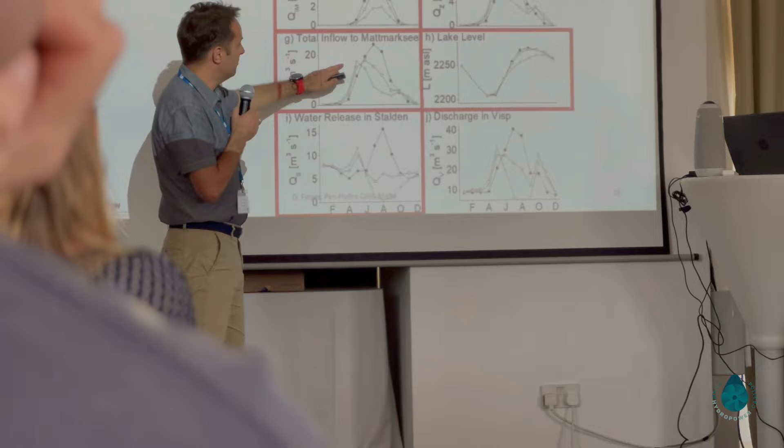Okay, so once again, for people online who could not hear my first couple of sentences: I just mentioned that this will be a research-focused session on unconventional hydropower, and we focus on the role that this unconventional hydropower can have on grid flexibility.

We're going to have three speakers, three young researchers, either last year's PhDs or early postdocs, so I will not waste more time with the introduction. I will jump to the first presentation. The first speaker will be Dr. Stefano Cassano. He's from HES-SO in Switzerland, and he's going to talk about increasing operational flexibility of hydropower, application to La Rance station and other use cases.

Just give me 30 seconds to better introduce Stefano. He received a master's degree in electrical engineering from the Polytechnic School of Genova in Italy in 2018. As part of the Erasmus program, he also conducted research at the Université catholique de Louvain in Louvain-la-Neuve, Belgium. He also holds a PhD in electrical engineering from ParisTech University PSL, earned in 2022. Since 2023, he is a postdoctoral researcher at HES-SO in Switzerland. Stefano, the floor is yours.

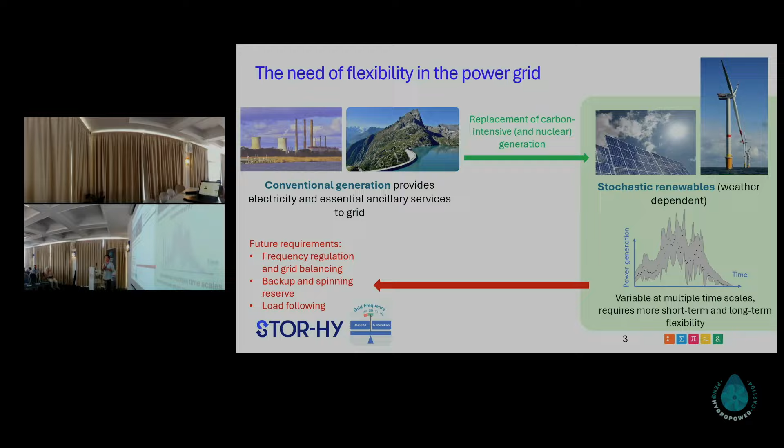In particular, they will be asked to provide more services such as frequency regulation and grid balancing. That means we want to keep the grid frequency at 50 Hz, so this generation has to play a bigger role to balance this frequency. We also have backup and spinning reserve, because one of the key features of the grid is inertia, so we need the spinning rotation of the machines. And then also load following, which means we should provide the capability to increase the power to match the demand.

Now, hydropower is the largest source of renewable electricity worldwide, with more than 50% of the total renewable generation. Hydropower plants are dispatchable, which means they can contribute to grid flexibility in both the short term and the long term. Regarding short-term flexibility, hydropower plants can provide fast regulating power. Usually, hydropower plants can increase their production by about 20% of nominal capacity per minute, and they also provide fast startup times thanks to the lack of thermal time constants compared to fossil fuel-based power plants.

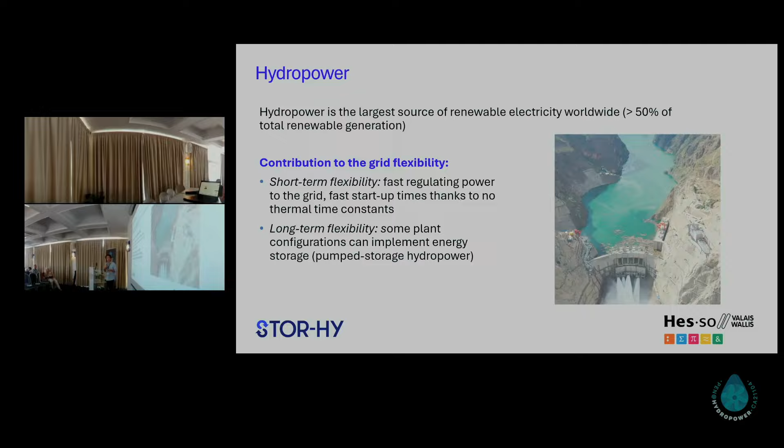Then, for the long-term flexibility, some of the plants can provide storage, for example, the case of pumped-storage hydropower plants. Okay, so the future challenges for the hydropower plant will be that operating this plant in the future grid will require upgrades to handle the increased operation duties of the plant.

So among the proposed solutions or technologies, it's worth mentioning two technologies, which are the variable speed and the hybridization. The variable speed refers to decoupling the grid and the generator frequency to have a more flexible control. Usually, for example, the pumps are operated at fixed speed, which means that we cannot really change the speed of the pumps. Therefore, with variable speed, perhaps we can operate in other working conditions and perhaps increase the efficiency of these units. And with hybridization, I refer to coupling a battery energy storage system with the plant.

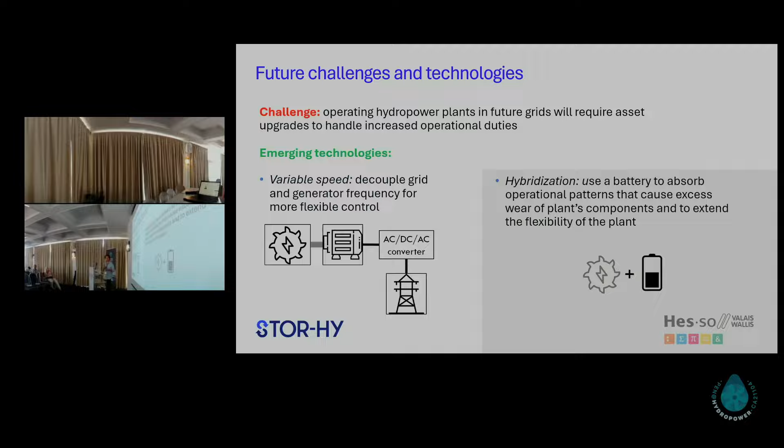So hybridization will be the focus of today's presentation, so I will spend some other words on it. This is the concept of a hybrid hydropower plant, which basically means coupling a local battery with the power plant, connected to the same SCADA system. The advantages are multiple. For example, the batteries can reduce the regulation duties of the hydropower plant. That means they can decrease the fatigue, for example, of the mechanical components of the plant.

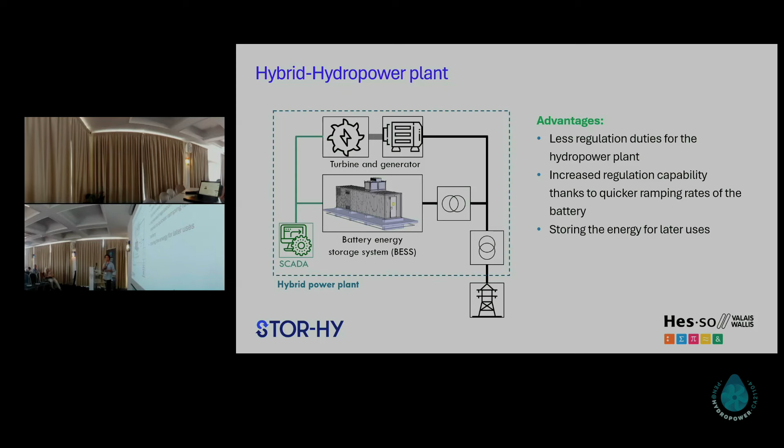Another advantage is that it can increase the regulation capability because the batteries are very fast to produce power. Before, I was talking about 20% per minute for hydropower plants. For the batteries, we are talking about 2000% in seconds. So they are really fast. And then, of course, batteries can store energy, so we can store energy and use it later when the demand is more.

Okay, so we arrive at the main character of today's presentation, which is La Rance. La Rance is a tidal hydropower plant, and with its 240 megawatt capacity, when it was commissioned in 1966, it was the first and therefore the largest tidal hydropower plant in the world. Then in 2011, they commissioned another tidal hydropower plant in South Korea, so now it's the second one in the world, but it's still quite big. The plant is equipped with 24 bulb units, 10 megawatts each, and they feature four-quadrant ability. That means that they can be operated as turbine and as pump, and they can turbine in both ways and also pump in both ways.

The nominal head of the plant is 6 meters, so quite low, because it's tidal. Then we have a nominal discharge of around 170 cubic meters per second per unit, and a total generation of around 490 gigawatt hours per year.

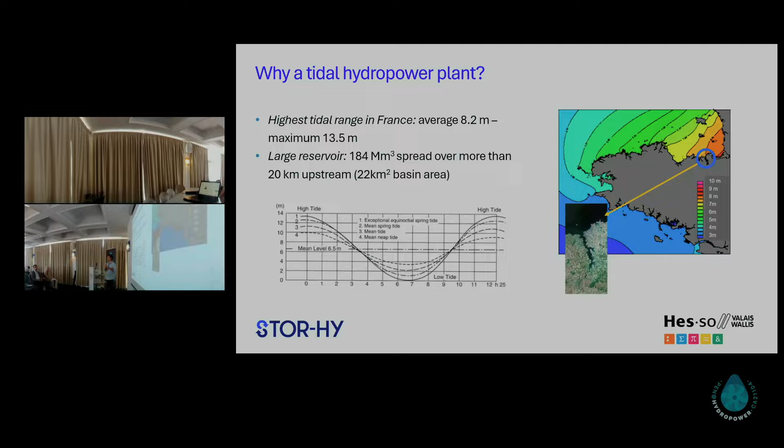So why a tidal hydropower plant? Because in this region, which I forgot to mention, we are in Brittany, in Dinard, which is close to Saint-Malo. In this region, we have the highest tidal range in France, with an average of 8.2 meters and a maximum of 13.5 meters. And we also have a large reservoir, given by the Rance River, that has 184 million cubic meters of water, spread over more than 20 kilometers upstream, resulting in a basin area of around 22 square kilometers.

Now, how is this plant normally operated? This plant is normally operated in two ways. The first operation cycle is called simple effect, or ebb generation, which means that we use one-way tide utilization. Perhaps, okay, I can point, nice. This means that the basin is filled at rising tide, and then the water is turbined when the sea level decreases.

Sorry. Okay, I will use my hand, sorry.

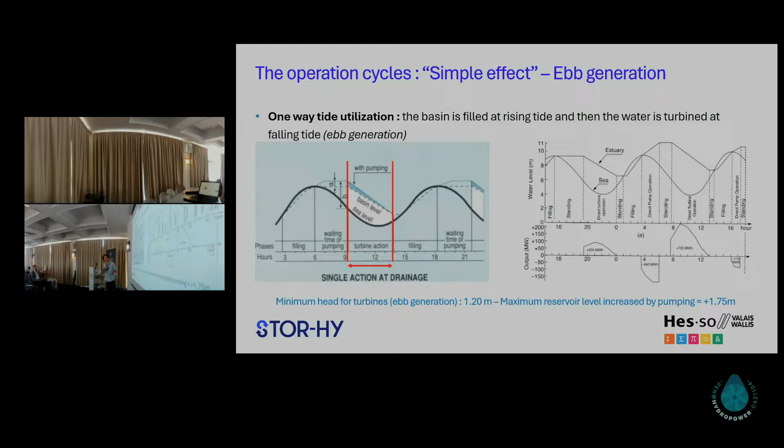So this means that compared to the previous case, when we are in the... now it works. Okay, nice.

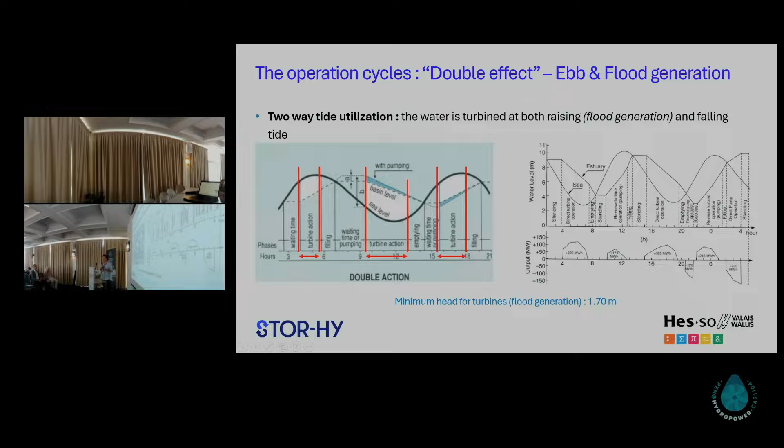And this operation actually allows us to spread the production more throughout the day compared to the case before, because before we had more, let's say, zero power production. Now with this operation, we can spread the power production more. And the minimum head for the reverse turbine mode this time is 1 meter and 70.

So this slide shows the share of the operation of this plant. Most of the time the plant is operating in the first mode, the ebb generation, accounting for 60% of the total operation. Then the reverse pumping is quite uncommon, around 0% of the operation, so almost never used. Then we have the flood generation, which is the reverse turbining, which accounts for 2 to 6% of the total operation, and only when the tides are really high, above 12 meters.

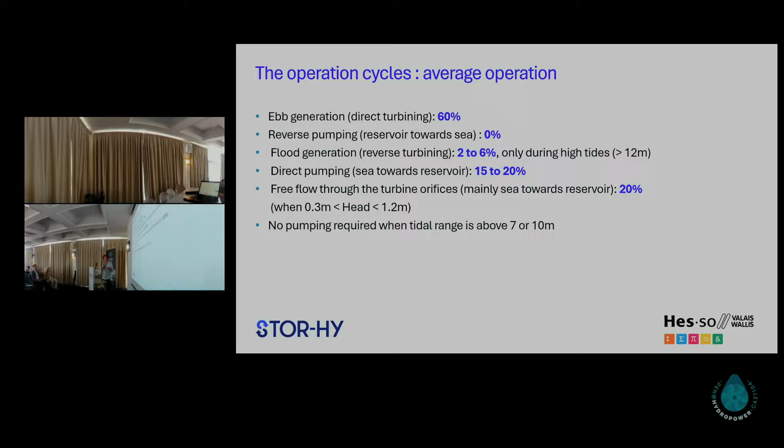And then we have the direct pumping, when the pumps increase the level of the basin, which happens for 15 to 20% of the operation. And then we have the free discharge that accounts for 20% of the operation. And another thing is that no pump is required when the tidal range is above 7 or 10 meters.

So now we saw this kind of operation, and we can draw some conclusions. The first is quite obvious: since this is a tidal hydropower plant, the power production depends on the tidal cycles. So it depends on nature, and we don't really have flexibility in that. The second point is that the plant is used only for power production, and therefore it doesn't really provide services to the grid, for example, frequency regulation.

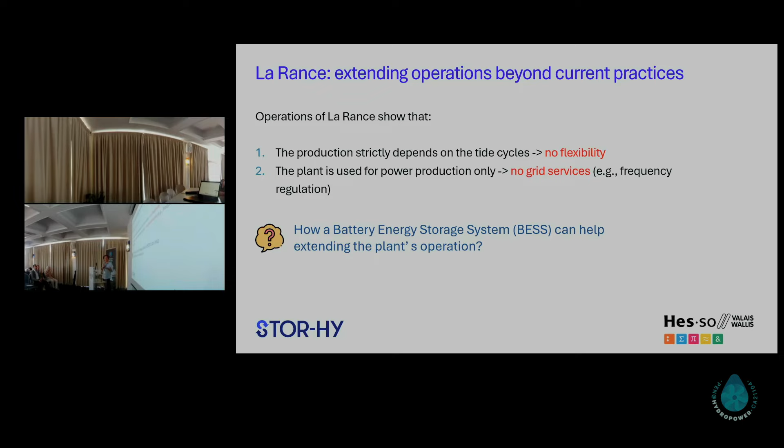So now the question we ask is: can a battery actually help to extend the operation of these plants, and how? To answer this question, I will introduce 2 use cases. The first one is about generation shifting. We saw that traditionally the plant is operated these 2 ways. The idea is to implement a battery to shift part of the generation from the tides toward the peaking periods, adapting the plant to human activities more than the natural cycles. And the second point is to spread the tidal generation through the day to avoid zero generation hours.

So the benefits: one I already said, to align the generation with the grid needs more than natural cycles. The second is to improve the dispatchability and the flexibility of the plant, because we want this plant to behave more like a conventional hydropower plant, so a controllable generation. And third, the battery can also be used to provide other services, for example, frequency regulation.

So the idea is very simple. The working principle is to use the battery to store some of the energy produced by the turbine, and then use this energy later. For example, if we consider 1 unit, instead of producing the maximum power, we can reduce the power injected into the grid, and use the other part of the power to charge the battery, which can then be used later when needed or to spread the power production.

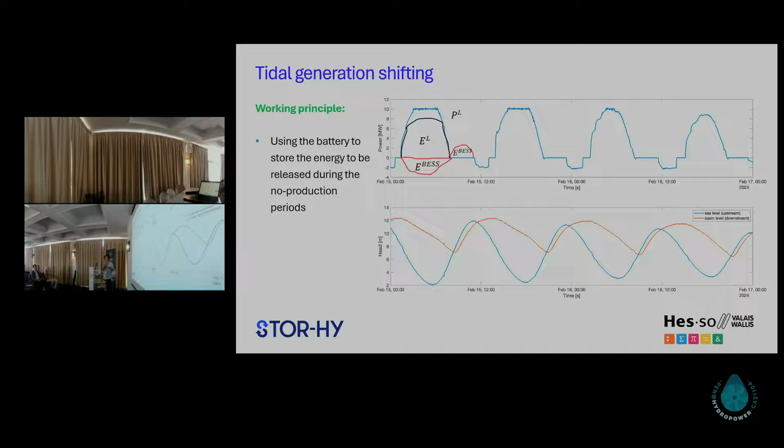So now the question we want to answer is how big the battery is going to be, or better, how we size the battery in an optimal way to also provide a good control. So to answer this question, we formulate this preliminary optimization problem, which basically aims at sizing the battery, but also finding a way to control this battery in an optimal way. So the formulation is the following.

In general, optimization problems are in the sense of minimizing some costs subject to some constraints which are related to the operation of the battery. So in particular here, we have the cost function, which is composed of two terms: the CAPEX and the OPEX. The CAPEX are the initial capital investment. So we want to minimize how much we are going to pay for the battery in terms of power and energy. And on the other side, we want to minimize minus these terms, which means we want to optimize the OPEX, which are the revenues from the battery.

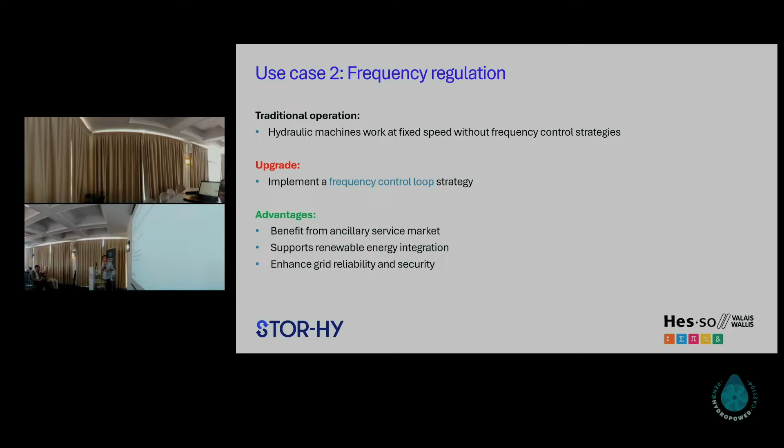So just to give an overview of how normally a hydropower plant is controlled to provide frequency regulation. A hydropower plant usually implements a speed governor, which basically controls the rotation speed of the machine to follow a design value, for example, the grid frequency of 50 Hertz. The speed governor, which is this one in the figure, implements a PID controller that translates the difference between the 50 Hertz and the speed of the machine into a guide vane opening. This means that if we have an imbalance, for example, a drop in the frequency in the grid, the controller tells the plant to give more power by opening the guide vane.

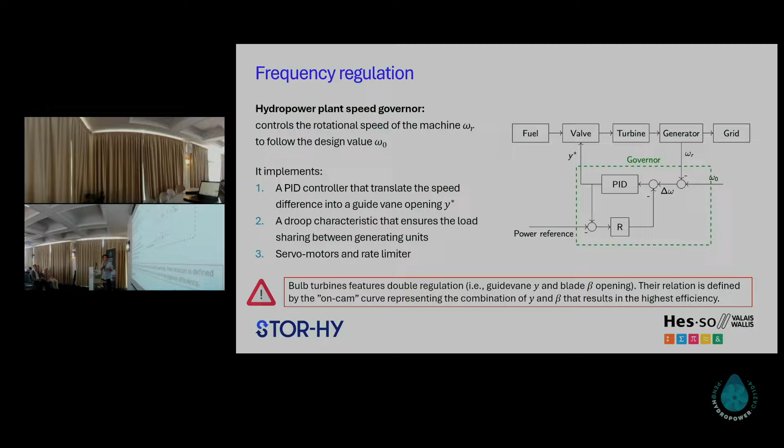This is for conventional hydropower plants. In the case of La Rance, we have bulb turbines. So instead of having just the guide vane, we also have another control organ, which is the blade. And usually the two are related by what is called the on-cam curve, that is the best combination of the guide vane and the blade opening that results in the highest efficiency. Then we have the droop characteristic that tells how much power the unit can provide. And then we have the servo motors and rate limiter, which are not drawn in this graph, but they are also in the controller.

So for a hydropower plant to provide frequency regulation, it is important that it fulfills what is called the pre-qualification test. This test basically investigates the ability of the controller to provide the service, but also the stability. The test consists in imposing a frequency deviation on the plant and then seeing how the plant reacts. In particular, the plant has to deliver 50 and 100% of the shared power within 15 and 30 seconds without exceeding some boundaries. In other words, it must not oscillate.

And the power that it's providing is set based on the droop, which is defined as follows. And basically here, the lower the droop is, the higher the power the hydropower plant can provide.

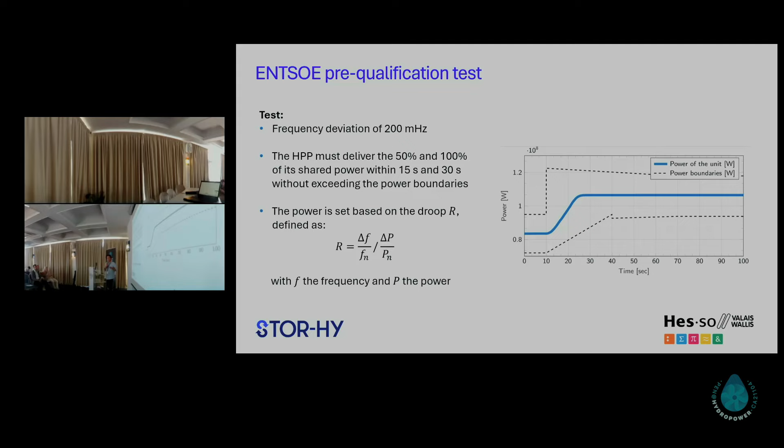So now, this is the idea of implementing also a battery. So how can a battery help to improve this frequency regulation? So the methodology is the following. We have the grid frequency, and we give this grid frequency to the hybrid hydropower plant. And then we have a hybrid controller, which we have to design, that basically wants to split the frequency between the battery and the hydropower plant.

So one idea could be to give to the hydropower plant the smoothest variation of the frequency, so that the hydropower plant can regulate in a smooth way and therefore reduce the fatigue of the mechanical components. The battery instead can take the harshest variation because it can provide fast power.

So to conclude, we saw how hydropower plants can contribute to enhance the flexibility of the grid. I showed how the La Rance hydropower plant is normally operated, pointing out the two critical aspects, which are the fact that the production depends on the tide, and that the plant is only used for production and not for regulation. Then I presented two use cases to extend the operation of La Rance, and I showed how we can preliminarily size a battery for the case of tidal generation shift.

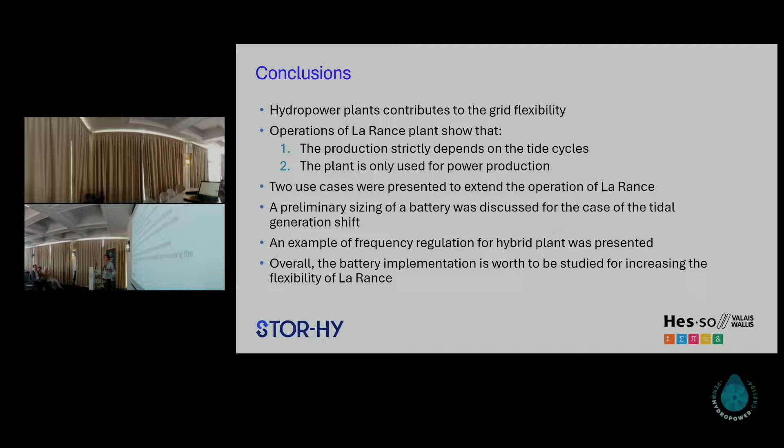And then I also provided an example of how a battery can increase the operation of the service of frequency regulation. And finally, to conclude, I would say that this battery implementation, in my opinion, is worth studying to increase the flexibility of this hydropower plant.

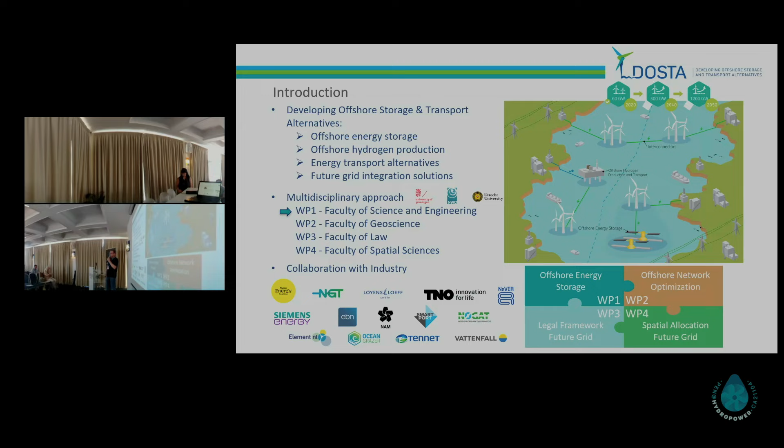We also had someone from the University of Groningen, from the Faculty of Law, who looked into the legal framework that we need to develop for the future. And from the Faculty of Spatial Sciences, we also had a student looking into the spatial allocation of the new renewable energy sources, how we could optimize that in the future. So my focus was mainly on the offshore energy storage system.

We would expect that this so-called ocean battery system would operate around the minute and hour market, similar to conventional pumped hydro. And we can highlight 3 development phases. Currently, we are in phase 0, where we're looking at the working concept and prototyping, and experimental measurements are being taken. The next step would be phase 1, where we want to place around a 1 megawatt rated system into a sand excavation lake.

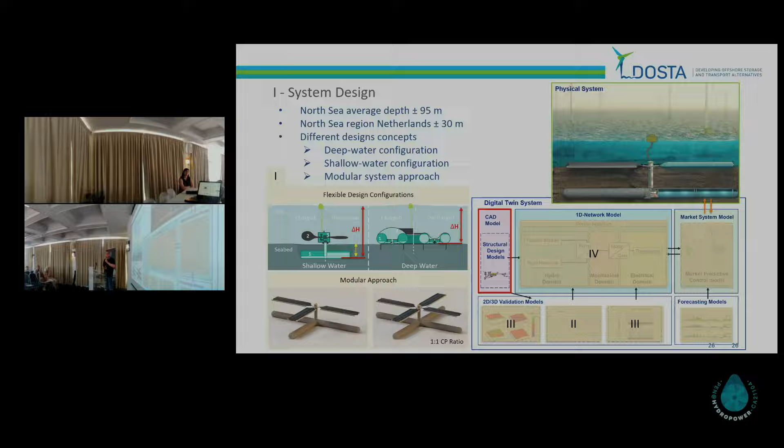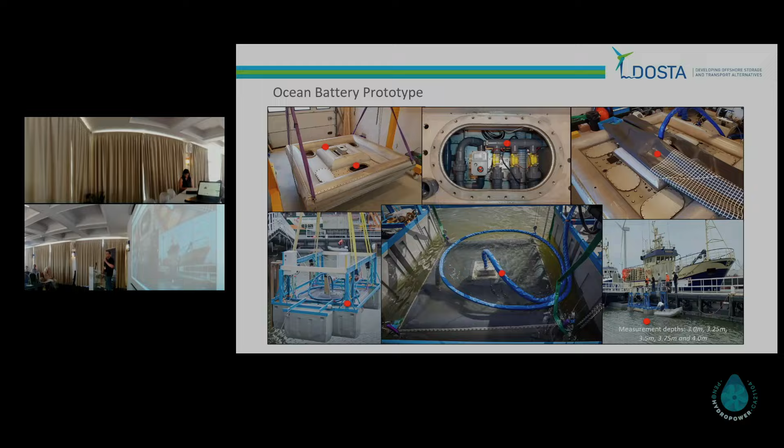On the bottom left side, you can see the barge system, which we also designed to be able to lower the system to the determined operational depth to be able to do multiple experimental runs. So we could also define the head in the system during the operation for every experimental run. In the middle bottom side, you can see the umbilical line, which is also seen on the right side, and you can also see the location, the Eemshaven in the north of the Netherlands, where we performed the experiments for the first prototype.

So one of the main objectives for the prototype session was to validate the working concept, also to see what the impact would be on the internal head losses of the system or the dynamics impacted by the novel elements that we added to the system. And also we wanted to measure the overall internal head losses. And then in the end, we wanted to scale up the system with a software that mimics the transient dynamics of the internal prototype and to determine its overall round trip efficiency. So under optimal conditions, the prototype is operating at around 77% round trip efficiency.

You can see here the sensors that we put down at different locations throughout the system to measure its internal head losses. I will come back to that later. It's one of the validation models that we use as an input to the 1D network model for simulating the transient dynamics of the system.

Now, another key feature is that since we placed the system into an open water environment, that's the goal of phase 3, we need to know what the environmental loading impact would be onto the system. Since we have a flexible bladder, we would want to know if marine biofouling, sand deposition due to scouring, or environmental loads due to waves, swells, and tides would have any impact on the transient dynamics of the system. So that we investigated with additional research. You can see some examples.

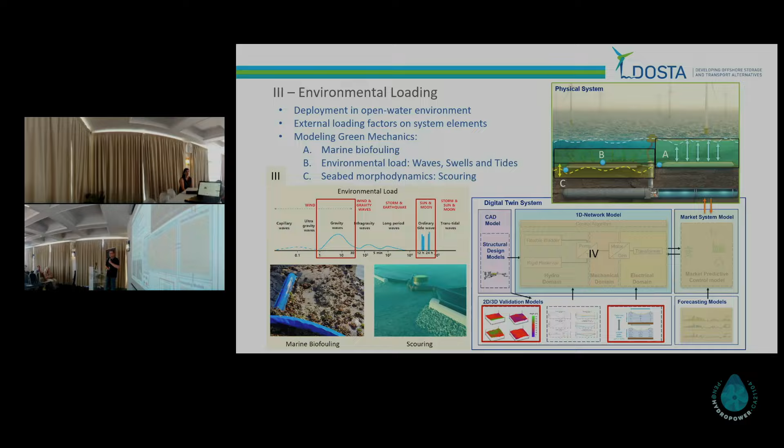We mainly focused on wind waves, swells, and tides for the environmental loading. We did some experiments also for marine biofouling over time. And together with the Deltares Institute in Delft, we also performed some scouring simulations and experiments. For the scouring, you can see here the setup of the system. The video is sadly not working, but you can see that we performed a scaled prototype experimental setup for one side of the system with the flexible bladder in there, the geotubes that would hold the system down, together with a part of the ducting and the base structure as well.

We performed some pressure measurements for different sea states, and we wanted to see the complex interaction between the structure and the seabed over time. We did that for different test conditions: for unidirectional flows, bidirectional flows, so for the tidal interaction, and also for once in 50 years storm wave conditions. For different orientations, we looked into the impact of scouring, and then together with the in-house software of Deltares Institute, we also scaled up the system to the large scale dimensions and performed this experiment again for a longer period of time to see if there is any impact of the scouring and sand deposition.

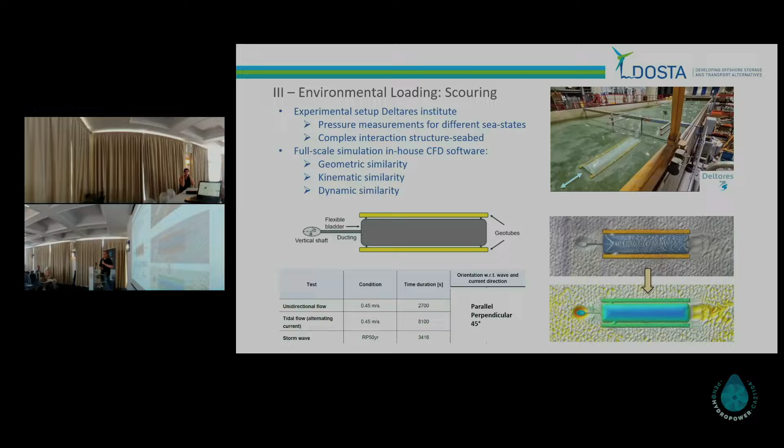For the waves, swells, and tides, we actually did a different simulation. We included the wave dynamics using linear wave theory, where we defined two main areas in the North Sea region, one in a shallow water region, one in a deeper water region. And there we identified what the combined impact would be of waves, swells and tides on the

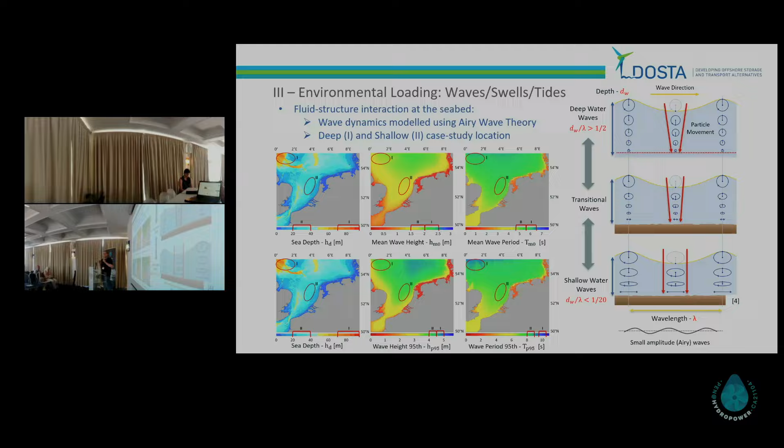flexible bladder. Because the idea is that since the flexible bladder would transfer the hydrostatic pressure of the surrounding seawater in a 1-to-1 ratio into the system, if a wave would pass over, there would be a pressure deviation that could propagate into the system and also would result in an alteration of the internal transient dynamics during charging and discharging operation. So we needed to be sure to see what the impact would be of this. So for both regions, we looked at different sea depths, different wave heights and wave period conditions, and we implemented that into the 1D network model.

For the simulation of the system, we collaborated also with Power Vision Engineering, a spin-off company from the EPFL, where we used their 1D network modeling approach to simulate the system. If the three different domains are combined, they're using an analogy for the SIMSEN software. So we could also simulate different Francis reversible pump turbine configurations to see what would be the optimal size for our system for every phase.

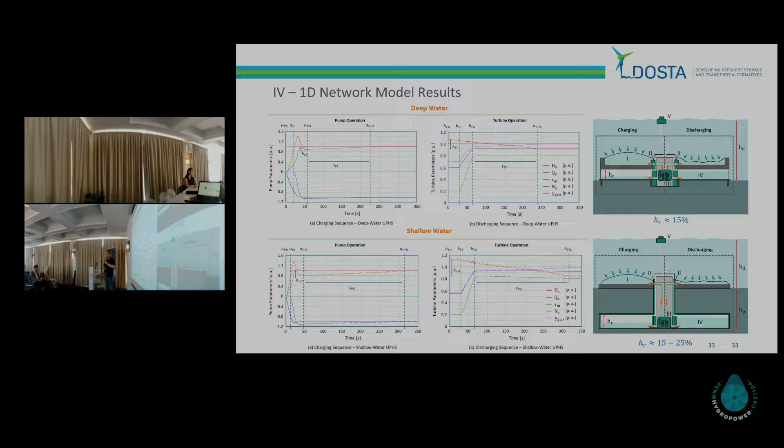So yes, this is a brief overview of the steps that we are currently looking into to develop the system, and we are currently looking into variable speed operations and operational control algorithms to also add to this system and expand it further. So to conclude, for the underwater pumped hydro storage system, we look at different design considerations based on

the deployment location. We use experimental measurements to perform and to validate the novel elements. We include external loading factors for the open water environment. And for future work, we want to look into more variable speed operations to see how far we can push this system and where we can operate. On the internal losses, we expect the external loading to have an impact of 1 to 2% of the head loss.

And the overall efficiency, as we see it now from the 1D network model simulation, is around 68%, the round-trip efficiency of our system. Yeah, that was my presentation.

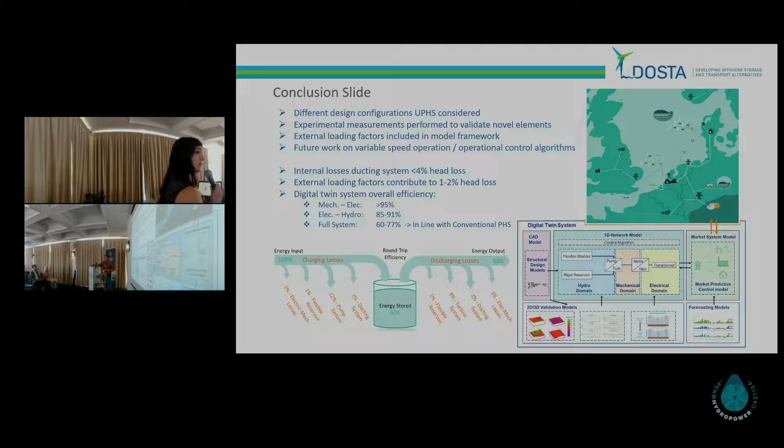So our next and last but not least speaker, Sudesh Dahal from ETH Zurich in Switzerland. He will talk about reservoir sedimentation management in Switzerland for sustainable hydropower under climate change. So we now go back a little bit more into conventional hydropower, but with a new hidden... doesn't this work?

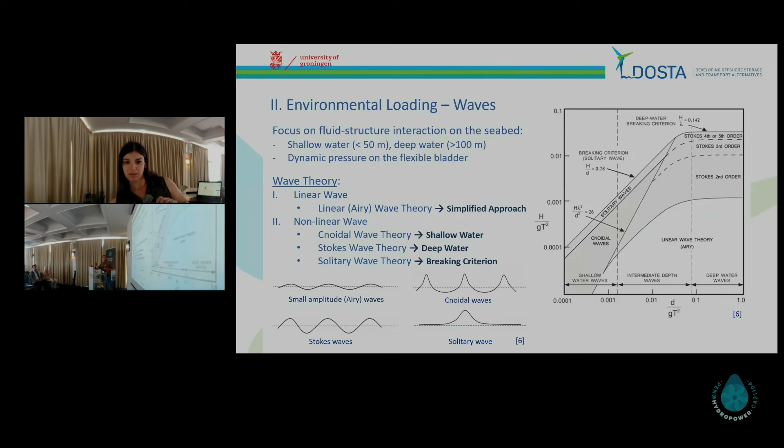Oh, those are additional. This was yours. They are the additional slides. Okay. Yeah, that one. This one. That's the first one? Yeah. This one? That's blocked. No, that's the previous one. No, the previous one is the one. And why is this blocked? There seems to be some... Yes. Okay, so that was just the introduction. Okay.

Let me introduce Sudesh. He's a civil engineer specializing in hydraulic and hydropower engineering with extensive experience in hydraulic design, sediment transport modeling, and sustainable reservoir management. He's currently completing his PhD in hydraulic engineering at ETH Zurich, where his research focuses on numerical modeling and reservoir sediment management strategies under future climate scenarios.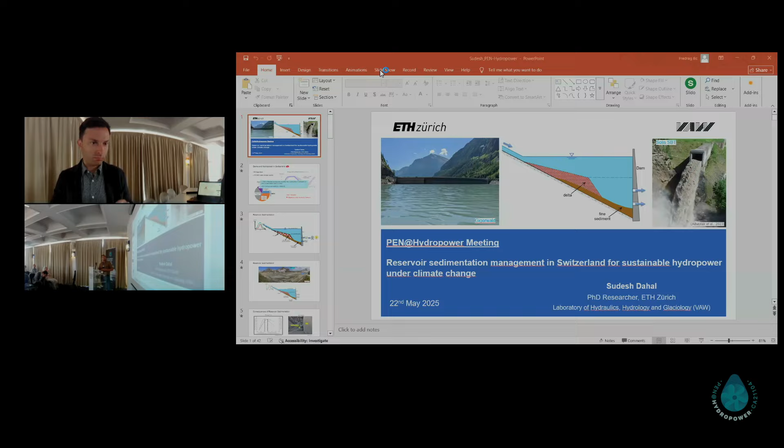So we will go a little bit back to more conventional hydropower now, but we will see which kind of hidden opportunities we have to improve storage capabilities in conventional hydropower plants. So in a sense, we will see some unconventional aspects. And we will see with Sudesh how it's possible to consider sediment management in order to improve the storage capabilities. Just try. Okay, now it seems to be all good.

Yes. Thank you, Elena, for introducing me, and good morning and welcome everyone to my presentation in this meeting. I am presenting my PhD research topic, which is reservoir sedimentation management in Switzerland for sustainable hydropower under climate change. So I'm mainly dealing with the problem of sedimentation in reservoirs.

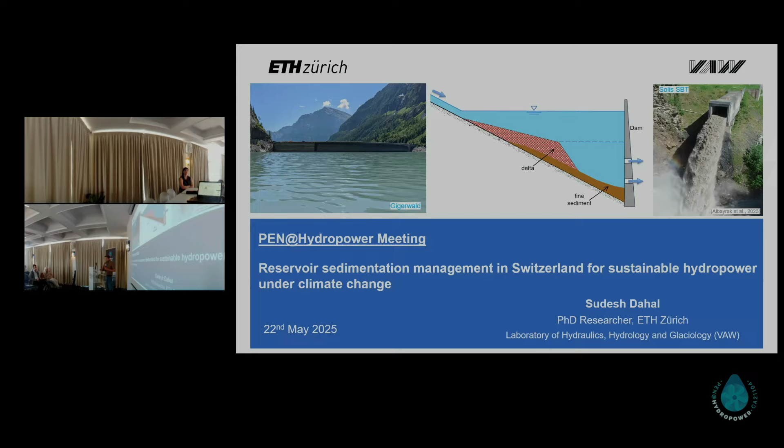The conventional way of operating hydropower reservoirs has mostly been to postpone the problem of sediment to the future. But I am trying an unconventional way of operation by integrating sediment management strategies to ensure long-term sustainability of hydropower storage capacities. A brief introduction about dams and hydropower in Switzerland. There are more than 200 large dams with about 3,100 million cubic meters of water storage capacity.

And in terms of electricity source in Switzerland, more than 56% of electricity is sourced from hydropower. And among that, more than half of the hydropower has the storage capacity flexibility, which is indicated by this seasonal energy content of Swiss reservoirs, which shows that the reservoirs are mainly used to store electricity during the summer months, during the high flow in the river, that is utilized during the winter months to balance the seasonal variation of electricity demand.

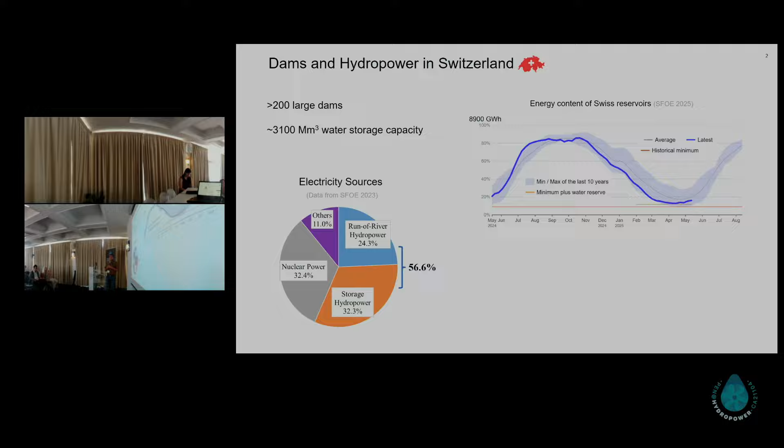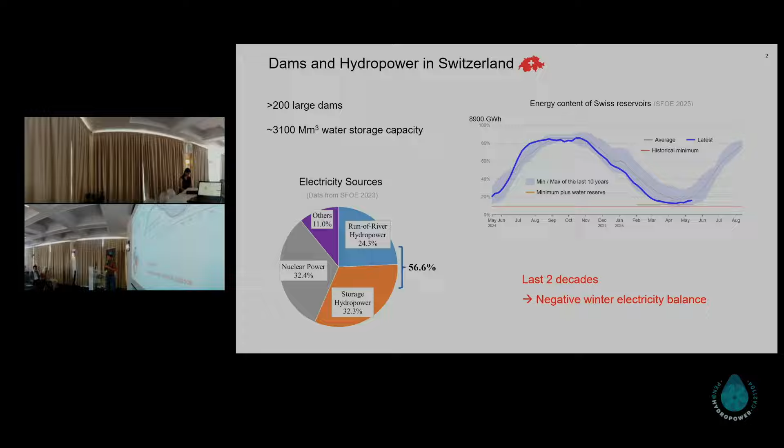However, in the last 2 decades, the balance of winter electricity has been negative in Switzerland, which emphasizes the importance of more storage capacities in Switzerland. And also, this is a statement from the EU Hydropower Alliance that indicates that about 1 terawatt-hour of flexible hydropower enables the construction of at least 3.5 terawatt-hour of intermittent wind or solar. So this emphasizes that storage hydropowers are essential not only for seasonal flexibility, but also to the flexibility to integrate the wind and solar renewables into the overall grid system.

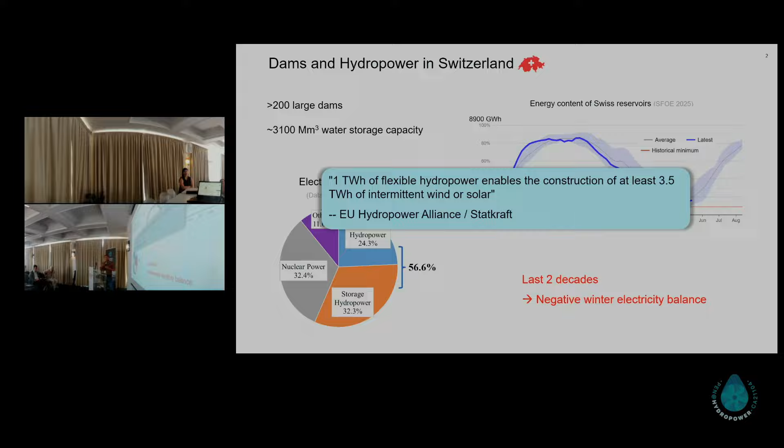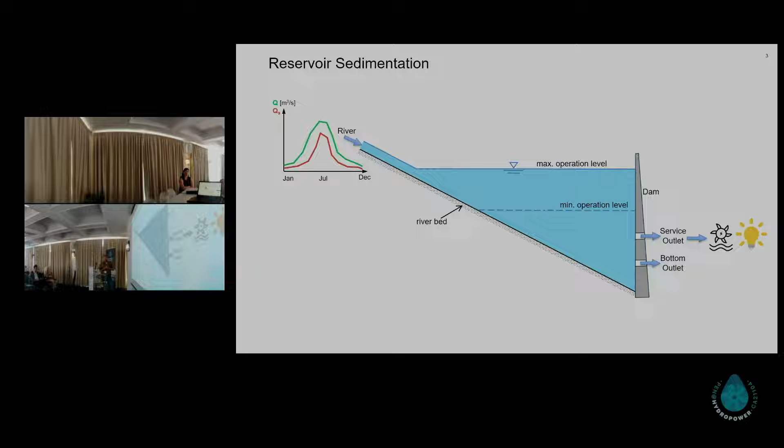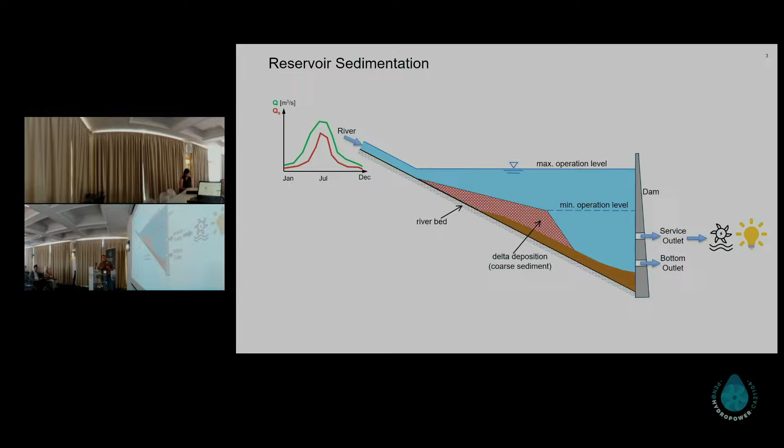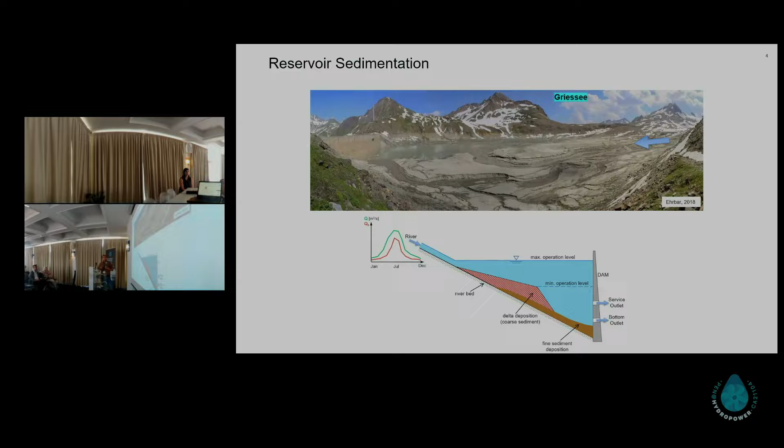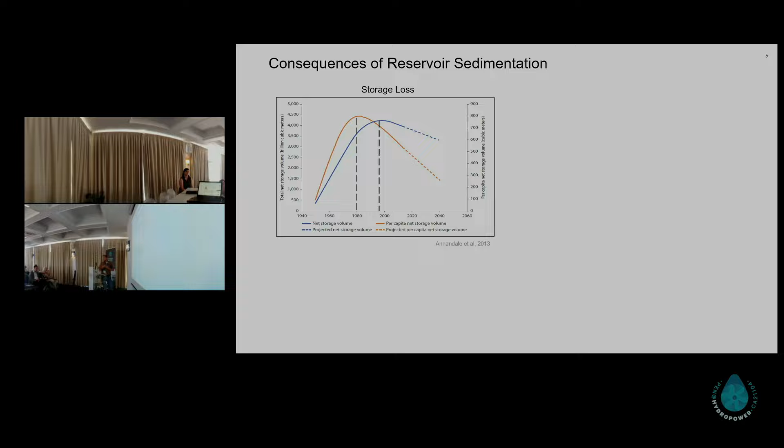So these are the main consequences of reservoir sedimentation. One of the main consequences is the loss in hydropower storage capacity, which indicates that currently the trend is declining. That means the increase in global water storage capacity due to construction of new dams is not compensating the loss in capacity due to sedimentation. And also in terms of per capita, this rate of decline is even more critical.

And another issue is the issue of dam safety. For example, this is the example of a reservoir in Switzerland, which has been impacted by large amount of sediment deposition just upstream of the dam. The sediment level was increased up to the level of the bottom outlet, which also impacted the safe operation of these dam outlets, thus causing a problem of the dam safety aspect of the overall dam component.

In terms of the cost of reservoir sedimentation, it is estimated that currently the overall cost sums to be around 21 billion US dollar per year. However, only a very small fraction of this cost is being currently addressed. And if no sediment management measures are implemented in the operational scenarios, these costs will be mainly postponed into the future generation, thus causing an intergenerational unfairness. So this emphasizes the need to conduct more intensive investigation on reservoir sedimentation, not only to understand the processes behind them, but also to plan for effective countermeasures.

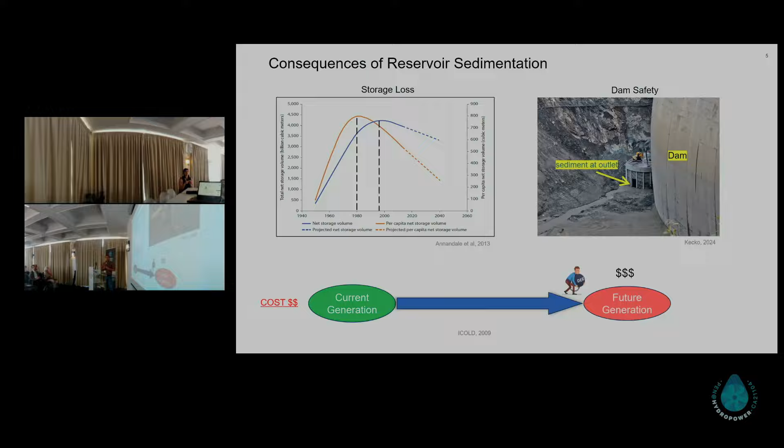And the investigation of reservoir sedimentation can be mainly done by conducting numerical modeling, which leads to the first research objective of my project, which is to conduct the 1D numerical modeling of sediment bypassing scenarios in a case study of Switzerland. Then I am also dealing with the problem of climate change scenarios in the case of Switzerland.

This is the plot that indicates that temperature has been rising in Switzerland since the last century, and there are three different climate change scenarios defined for Switzerland, which is the RCP 8.5, which is without any climate change mitigation measures. The best case scenario is the RCP 2.6, which is with high degree of climate change mitigation, and there is also an intermediate scenario called RCP 4.5, which involves moderate climate change mitigation scenarios.

And the main impact of climate change on the river discharge in Switzerland is estimated to be a seasonal shift in the annual runoff pattern. For example, the winter discharge may slightly increase as indicated in this plot, and the summer discharge may slightly decrease, thus causing a seasonal shift in the annual pattern of river flow.

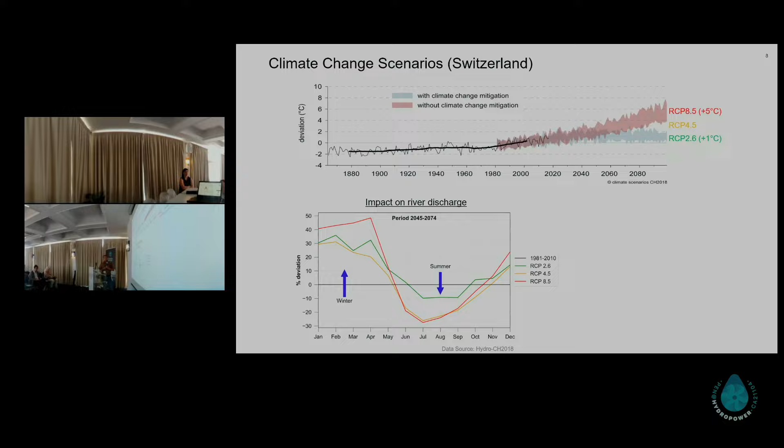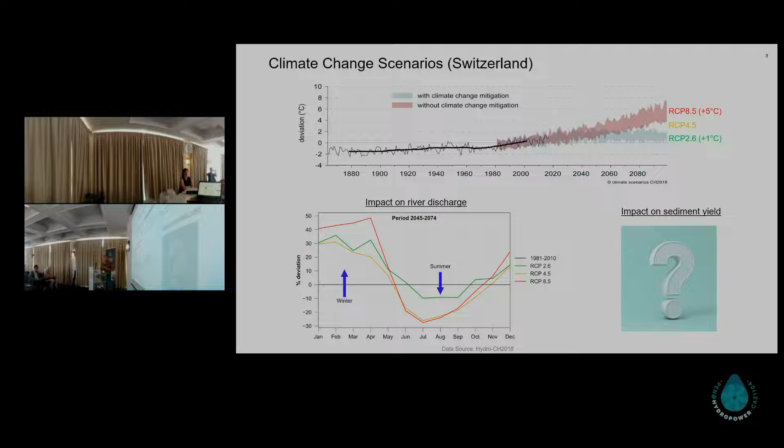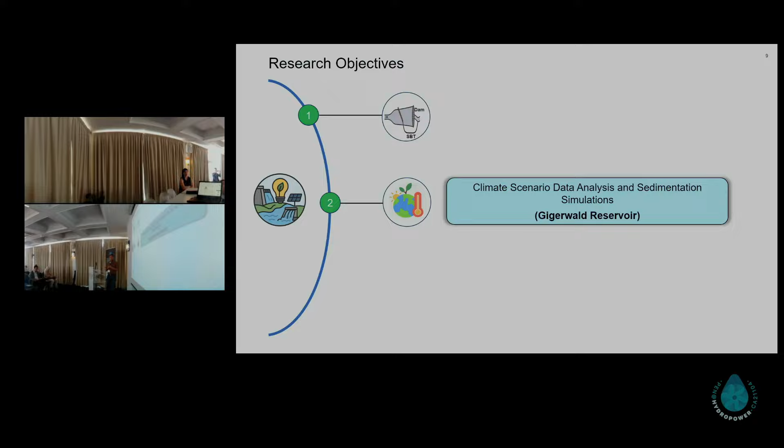However, the impact on sediment yield has been highly uncertain, although there are multiple hypotheses proposed. So a case-by-case study needs to be done to identify the impact on sediment yield for all these climate change scenarios, which leads to my second research objective, which is to conduct climate scenario data analysis and sedimentation simulations, in which I focus on a case study, the Gigerwald Reservoir of Switzerland.

which have a large degree of variance in terms of the water storage capacity. For example, it ranges from the capacity of 0.1 million meter cube to 400 million meter cube. Thus, a more improved estimate of overall reservoir sedimentation rate in Switzerland is necessary, that can be used to forecast a reliable estimate of the existing water and hydropower storage capacities.

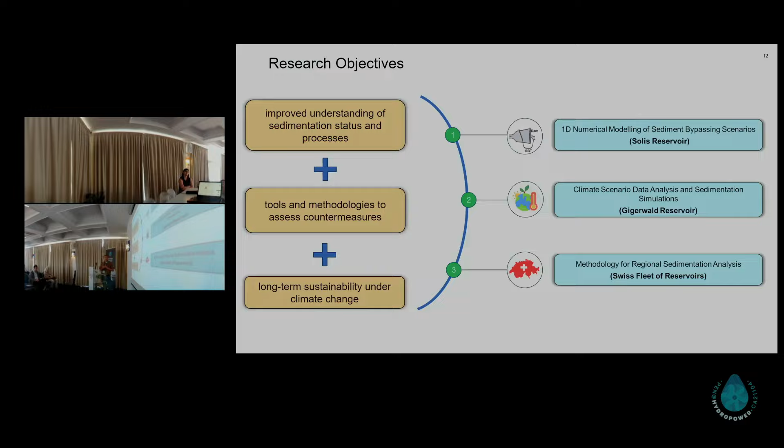This leads to my other research objective, which is to derive improved methodology for regional sedimentation analysis, in which I focus on the case of the overall Swiss fleet of reservoirs. And the overarching goal of this research project is to derive improved understanding of existing status and processes, also to demonstrate the tools and methodology to assess the countermeasures against sedimentation, to ensure long-term sustainability under climate change scenarios.

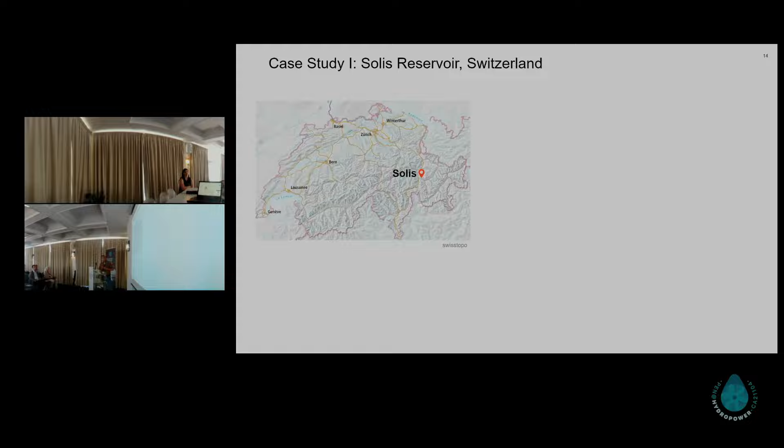So here are the methods and results of my first research objective. A brief introduction to my case study reservoir, which is the Solis Reservoir in Switzerland. This is the location of the Solis Dam in the map of Switzerland. This is the layout map of the reservoir, which is fed by the Albula River, as shown in the bottom right corner.

And the main feature of this reservoir is that it has a sediment bypassing tunnel, which is shown as that red line. This bypass tunnel has the inlet in the middle reach of the reservoir and was constructed in 2012 to mitigate the further adverse impacts of sedimentation. It mainly operates to bypass the incoming sediment away from the main part of the reservoir to release the sediment downstream of the reservoir, thus not allowing the incoming sediment to settle into the reservoir, causing more adverse impacts. And this sediment bypass tunnel is abbreviated as SBT, that I will frequently use in my presentation.

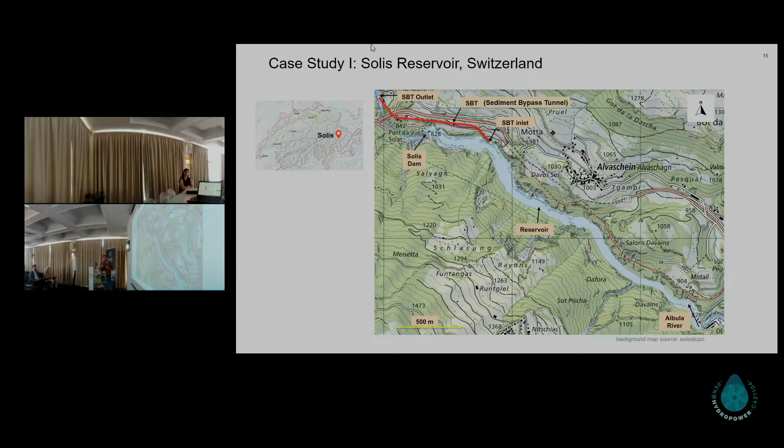This is about the historical sedimentation profile in the reservoir. And we can see that since its construction in 1986, there has been a large amount of sediment aggradation, not only in the form of the delta deposition, but also in the form of the rise in bed elevations near the dam. And in 2012, the SBT was constructed, which has partly mitigated further adverse impacts of sedimentation.

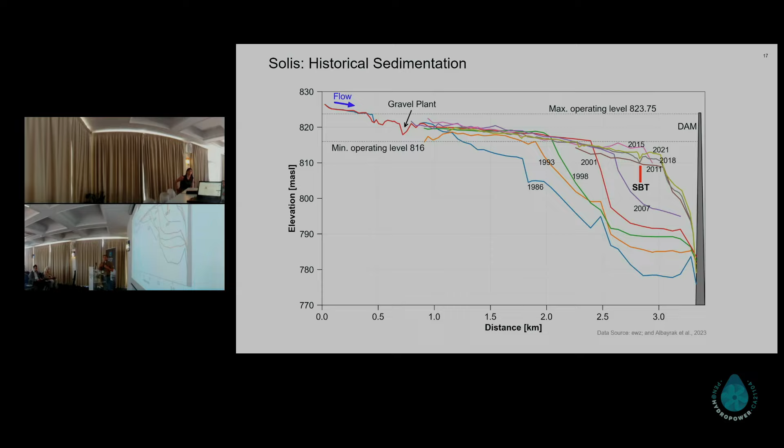And in my case study, I focused on the case of 1998 to 2001 to calibrate the numerical model, and then focused on the case of 2018 to 2019 to conduct multiple scenarios of sediment bypassing simulations in order to identify an optimum solution for the sediment management.

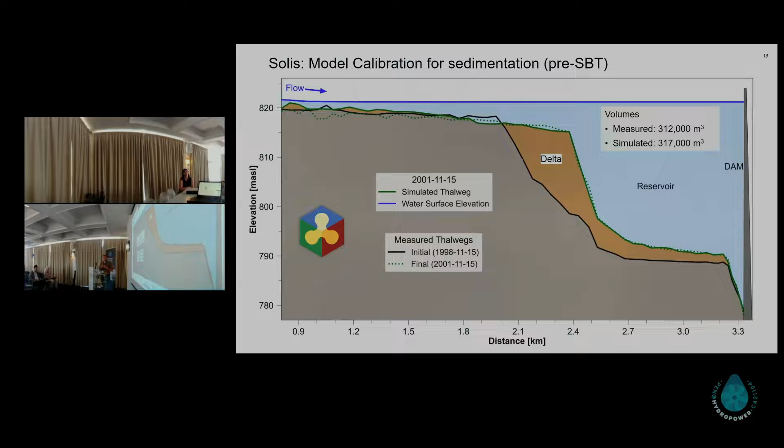So this is the result of my model calibration, which is an animation of the numerical simulation of the sediment input from the upstream region. So the upstream boundary is supplying both water as well as sediment in forms of bed load and suspended load. And the aim of this calibration is to match the simulated and measured bed profiles, which shows a good agreement, and also to match the sediment volumes, which is also in a good agreement, thus calibrating the overall model performance.

And for the modeling of SBT operation, this is a simple sketch of the different fluxes of the water and sediment through the SBT, and I derived a novel equation as shown in this plot for the flux of bed load that can be bypassed through the SBT in terms of the water discharge and the reservoir water level.

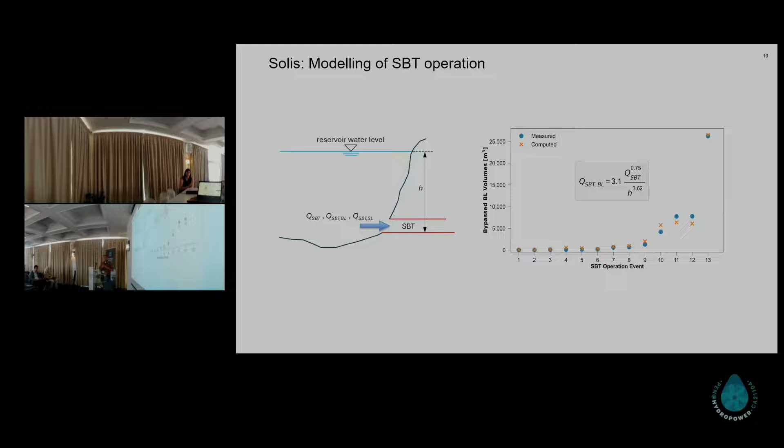And using this approach, I conducted multiple scenario simulations for the sediment bypass tunnel under a given flood wave of June 2019, which was a 5-year flood event in the reservoir. So these different scenarios were designed for different timings as well as duration of the sediment bypassing operation.

So all these scenarios have a different degree of cost related to the loss of revenue generation during the SBT operation, because during the bypassing process, the water cannot be used for the power generation. So I assessed all these scenarios by conducting numerical simulation to quantify how much of the storage capacity can be recovered under these scenarios.

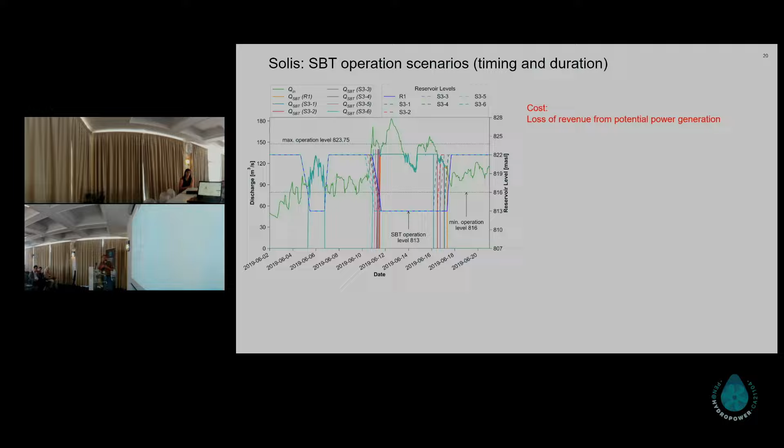So the cost of these scenarios is related to the loss of revenue from potential power generation, and the benefit is related to the additional revenue from peak energy generation in future that can be obtained from the recovered active storage.

So I conducted a cost benefit assessment, and the net benefit is computed as the difference of the benefit and cost. So this is the plot of the normalized net benefit for different price ranges of the base energy and peak energy price, where I demonstrate that it is possible to identify an optimum solution of sediment bypassing, which is not only technically feasible but also feasible in terms of the economic considerations. Thus, the numerical model is useful to conduct this type of analysis, also to support the economic viability of the sedimentation countermeasures.

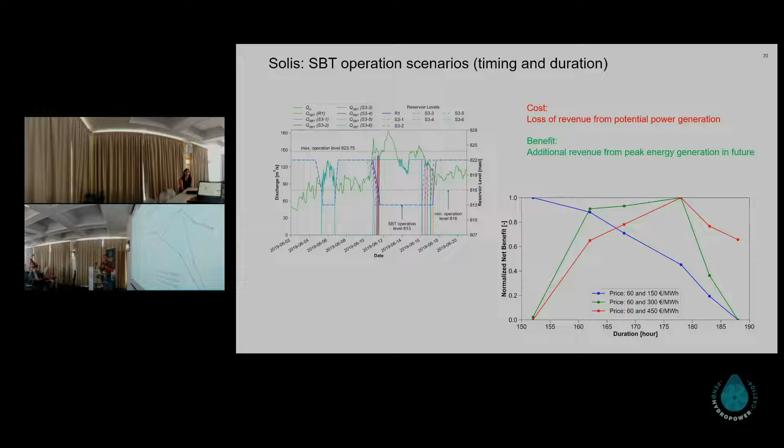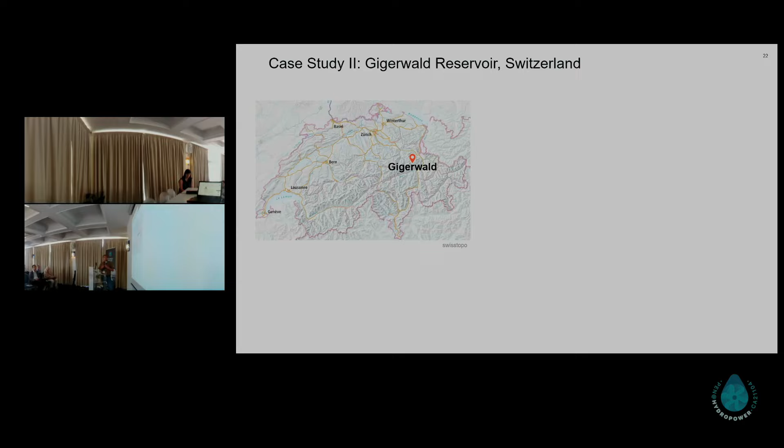I move on to my second research objective, which is the climate scenario data analysis and simulation, which is the case study of the Gigerwald Reservoir in Switzerland. This is the location of the reservoir in the Swiss map. This is the layout map of the reservoir, which is fed by the Tamina River, and it also has an inflow from an indirect catchment called Wistanenthal.

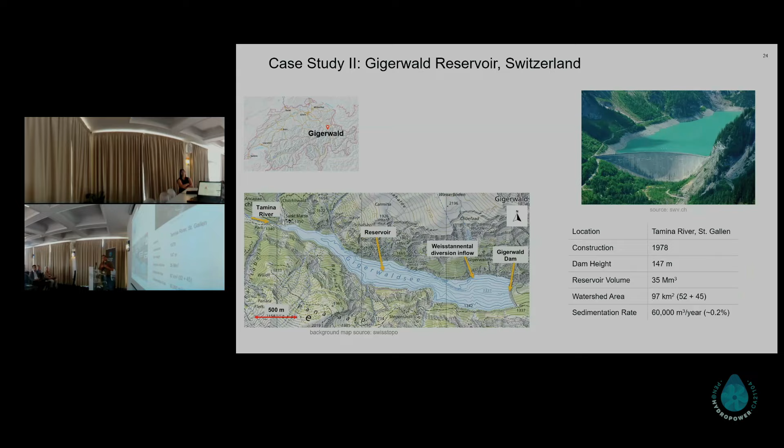This is the picture of the dam, which was constructed in 1978 as a 147-meter high dam with an initial volume of 35 million meter cube, and the sedimentation rate is estimated to be 60,000 meter cube per year. The main sediment problem here is the rise in bed elevation near the dam, which is about 0.5 meter per year. And because of this, the dam bottom outlet has been recently reconstructed to a higher elevation, which required a large amount of cost for those construction activities, mainly caused by the sediment problem.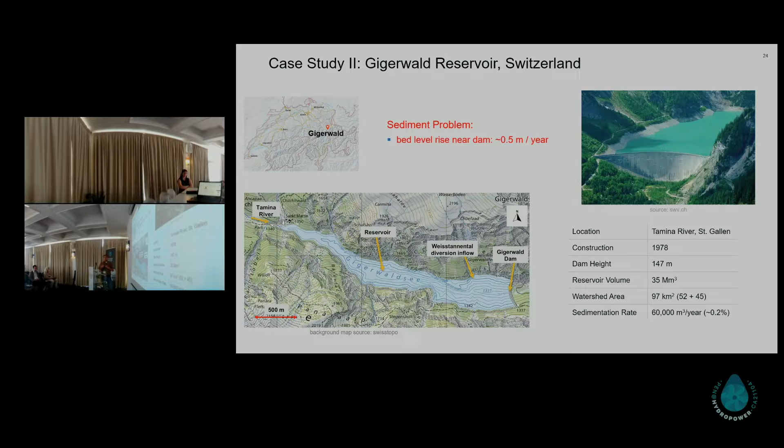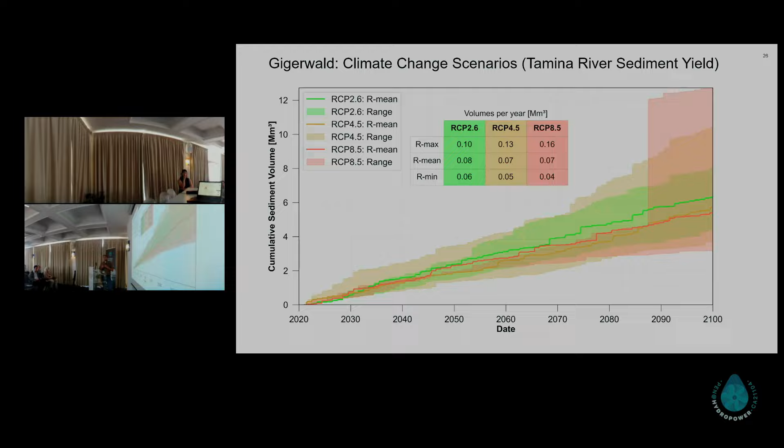I use this runoff data to derive the sediment input into the reservoir by using the validated sediment inflow equations based on numerical modeling. So this is how the sediment input looks until the end of the century for all these climate change scenarios. And it is interesting to note that in some climate scenarios, there is a sudden spike of sediment input, which is mainly related to the occurrence of extreme flood events associated with climate change.

So using this data and using the validated numerical model, I conducted a numerical simulation of sedimentation until the end of the century. So this is a brief animated video of the numerical modeling progression, which mainly indicates how the supply of sediment from the upstream boundary gets distributed along the reservoir. As we can see, a gradual increase of bed elevation, mainly in the middle part of the reservoir, and also we can see the rise in bed elevation near the dam, which is mainly caused by the inflow of fine sediment from the adjacent catchment.

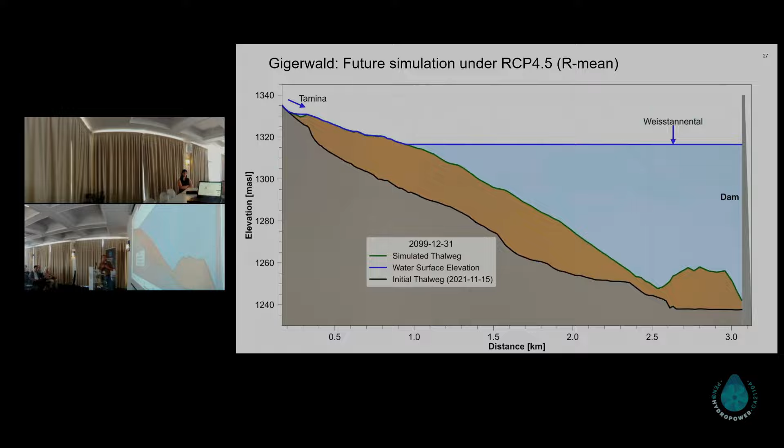And this sediment deposition is also gradually reducing the water and hydropower storage capacity of the reservoir. So this is how the result looks at the end of the century in the year 2100. So I demonstrated what kind of sediment management can be done under this scenario.

For example, the conventional approach of sediment management in this reservoir has been to limit the inflow of high sediment concentration from the adjacent catchment Weisstannental, which is adapted to be a concentration threshold of 4 gram per liter. And I demonstrated multiple scenarios of that concentration threshold. For example, by reducing the threshold to 2.5 gram per liter, it is possible to reduce the bed aggradation near the dam by a high amount, as shown by those multiple numbers of bed elevation rise near the dam.

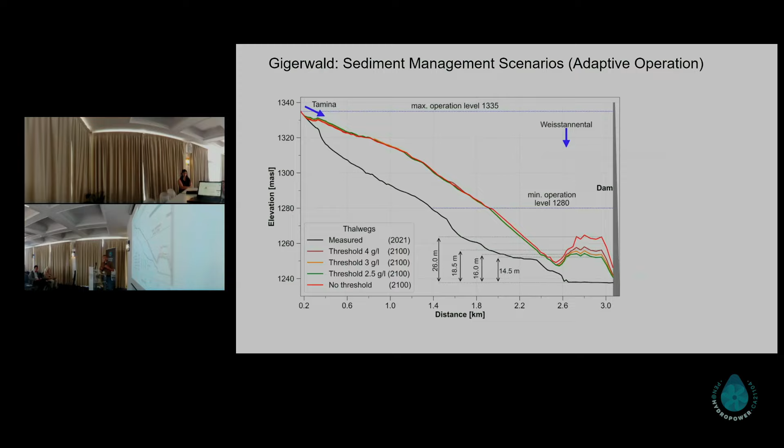And I quantified a metric called sediment management efficiency, which is the mitigation of potential impact of sedimentation against the impact without sediment management. And using these modeling results, I again quantified the cost and benefit metrics. For example, the cost of this sedimentation countermeasure is related to reduction in water volume supplied to the reservoir. So, for example, 28% reduction in water volume will cause a reduced bed aggradation of 11.5 meter

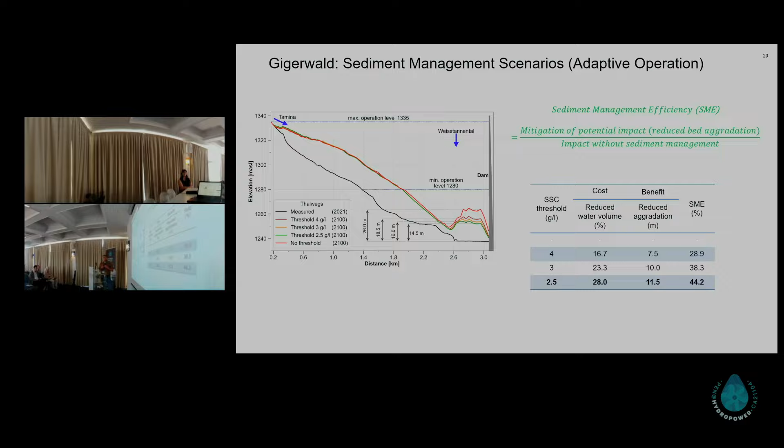with a sediment management efficiency of 44%. So these cost and benefit metrics can be used for a more detailed cost benefit analysis to support the optimization of sedimentation countermeasures in the long-term sustainability of the Gigerwald reservoir. And this approach can also be applied to other reservoirs worldwide. Finally, I defined an improved methodology for regional sedimentation analysis.

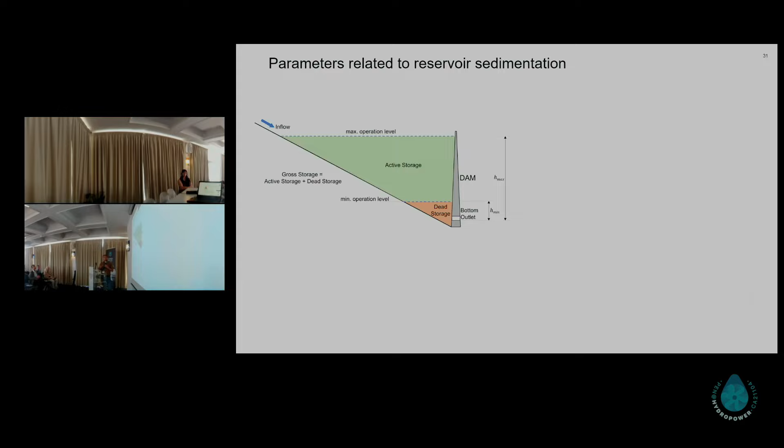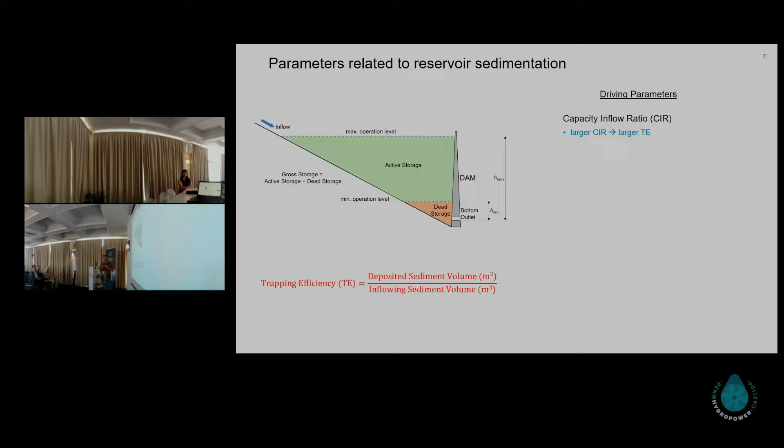Here, I briefly summarize the different parameters related to reservoir sedimentation. The main one I'm defining here is the trapping efficiency, which is the ratio of the deposited sediment volume to the inflowing sediment volume. And the main driving parameters for this trapping efficiency are the capacity inflow ratio, bed load to total load ratio, and the reservoir operation ratio, which is defined as the degree of fluctuation of the reservoir water level. And this trapping efficiency is defined as a function of these 3 different parameters.

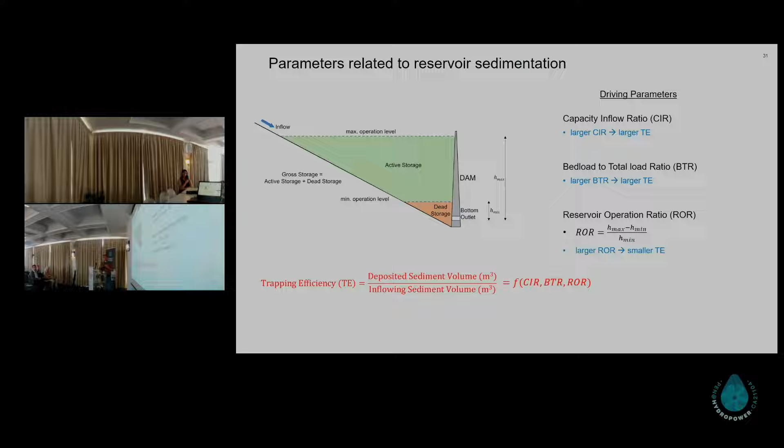So I defined a new equation for the sediment trapping efficiency based on the existing data from the field, as well as supplemented by additional data generated from numerical modeling of multiple synthetic reservoirs that typically represent the reservoirs of Switzerland. So this is the new equation that I derived for the sediment trapping efficiency, which is a relation between the 3 different parameters that I mentioned in the earlier slide.

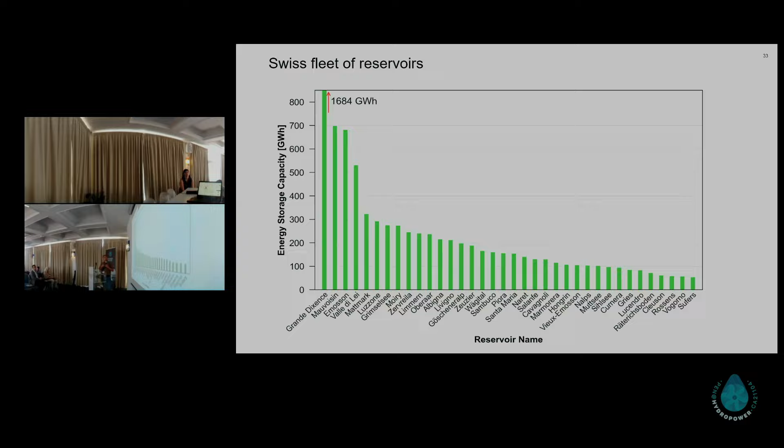And these are the largest reservoirs in Switzerland in terms of the energy storage capacity. For example, the Grande Dixence is the largest one, which has a capacity of about 1.7 terawatt hour energy storage capacity. And I identified that 35 of these reservoirs hold 95% of the energy storage capacity in Switzerland. So I focused on these 35 reservoirs to conduct further analysis.

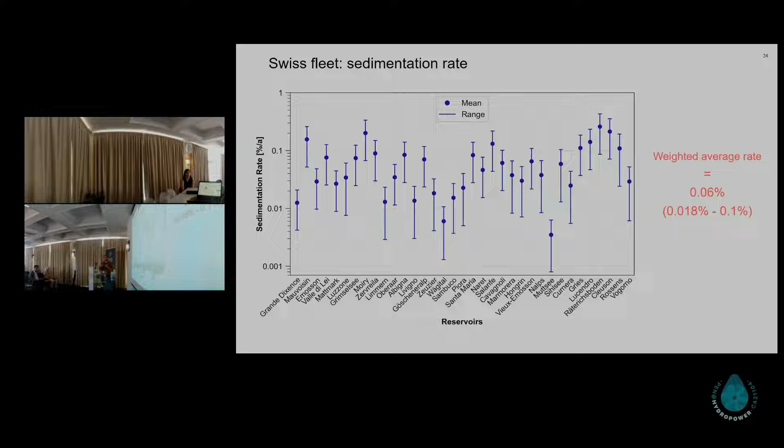And by using the previously derived trapping efficiency equation and the sediment yield estimates from the different literatures, I derived the sedimentation rate for all these 35 reservoirs. And I found out that the weighted average rate of sedimentation is about 0.06%, which is in the range of 0.018 to 0.1%. And using this sedimentation rate, I computed the future projection of water storage capacity in Switzerland.

For example, currently the water storage capacity is 3,100 million cubic meters, which may reduce by 4.6% by the end of this century. Similarly, I also estimated the hydropower storage capacity, which is estimated as 7,600 gigawatt hours currently, and it is estimated to reduce by 4.2% by the end of this century. So with this, I would like to conclude all my research activities.

In the first part, I derived a novel equation for the flux of sediment through the sediment bypass tunnel that can be used in the numerical modeling approach. And also I demonstrated a cost benefit optimization methodology for sediment management. I found out that with increasing severity of climate change, it may cause slightly less sedimentation, but this is only limited to the non-glaciated catchment that I was dealing with.

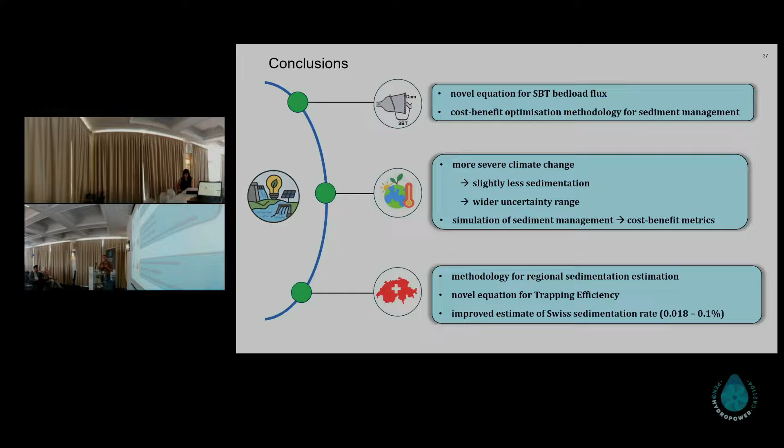And I demonstrated the simulation of sediment management scenarios and how it can support the quantification of the cost and benefit metrics that can be used for a more detailed cost benefit analysis. And I finally derived a new methodology for regional sedimentation estimation with a new equation for the sediment trapping efficiency that I used to improve the estimate of sedimentation rate in Switzerland.

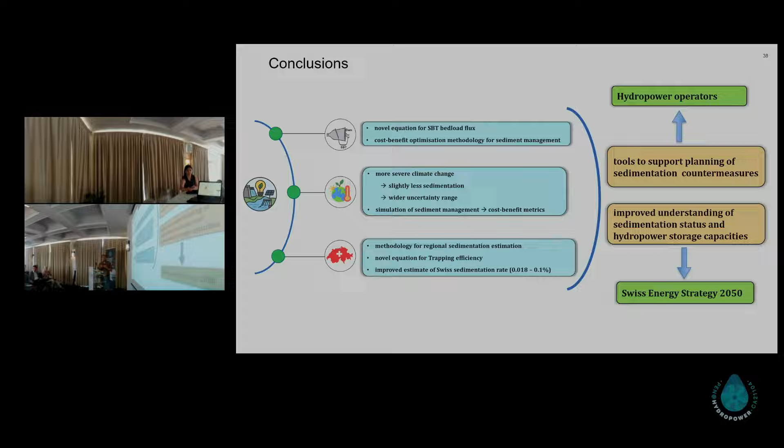And eventually the main finding is the methodology and tools to support the planning of sedimentation countermeasures, which will be useful for the hydropower operators, and also improved understanding of sedimentation status and hydropower storage capacities in Switzerland, which may provide useful information for the formulation of various policies related to the Swiss Energy Strategy 2050.